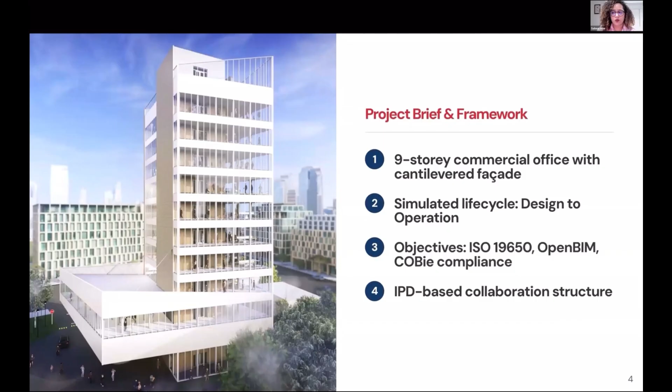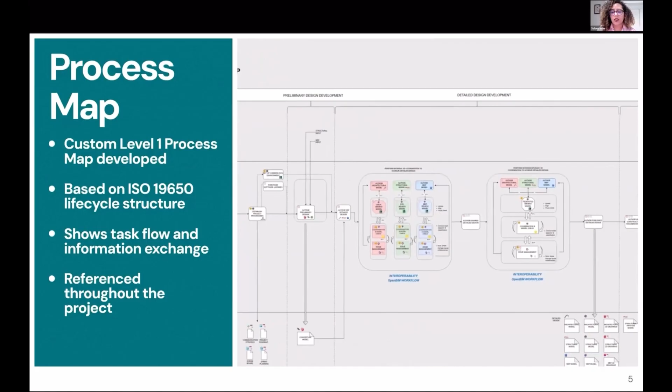To ensure a structured and efficient workflow, we developed a level 1 process map. This high-level overview, based on the ISO 19650 lifecycle, defined the sequence of activities, key decision points, and information exchanges across all project stages. Complementing this, our BIM execution plan served as our central management document. It aligned critical project elements, including team roles, project phases, level of information need, and common data environment procedures. The BEP functioned as both our strategic planning framework and our practical coordination tool, guiding our BIM implementation throughout the project.

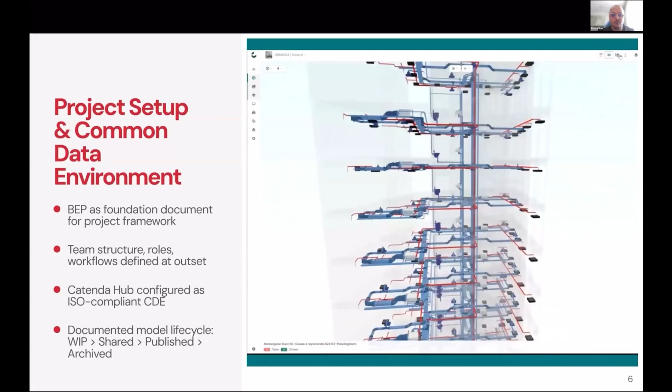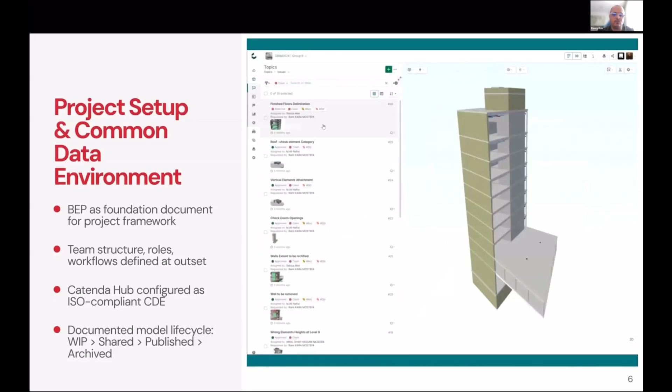To establish a single source of truth for our project data, we used the common data environment. Catenda Hub served as our ISO 19650 compliant CDE, ensuring efficient information management. File access was managed through role-based permissions, with files progressing from work in progress to shared and finally to published. This controlled process, paired with strict naming conventions, metadata tagging, and BCF issue tracking, enabled traceability and centralized coordination throughout the project.

To enable seamless interoperability, we established a comprehensive OpenBIM strategy built on 4 key pillars: tools, coordination, exchange, and federation. We used discipline-specific software, including Revit and ArchiCAD for architectural design and MEP modeling, and Tekla for structural engineering. IFC served as our standard format for data exchange, while BCF facilitated efficient issue tracking.

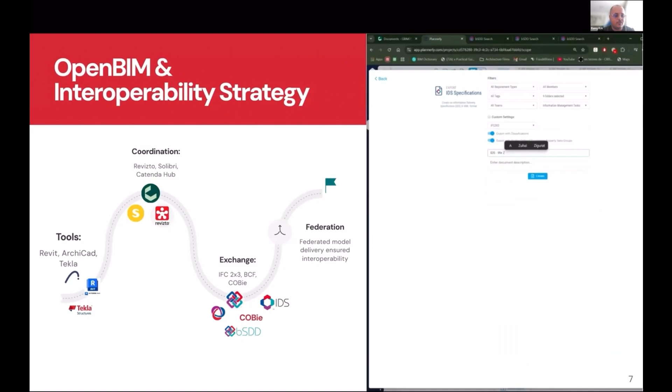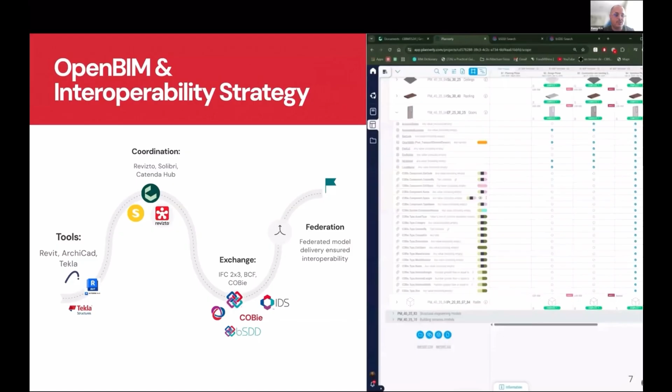To manage data requirements, we used the buildingSMART Data Dictionary, or bSDD, to define structured data requirements within our model responsibility matrix, generating information delivery specifications, or IDS, to ensure alignment, consistency, and compliance with the EIR. As for coordination, we began with federated model reviews in Catenda Hub and then transitioned to Revizto for advanced model navigation and handover planning.

For standardized information management, we applied ISO 19650 Part 1 for principles and terminology, Part 2 for structuring and delivery phase information, Part 4 for standardized exchange protocols, and Part 5 for secure and controlled data access. Part 3, while acknowledged, was outside the scope of this academic project. This framework was supported by our BEP, which included a RACI matrix, structured MIDP, ISO-based file naming, and classified information using the Uniclass classification system. The CDE lifecycle states enabled progression from design to delivery with full control.

In the design phase, the team developed discipline-specific models and coordinated them through structured IFC-based workflows. Clash reviews, model walkthroughs, and validation cycles were conducted during each sprint. Internal quality control was managed using tailored checklists, ensuring consistency and alignment before federation.

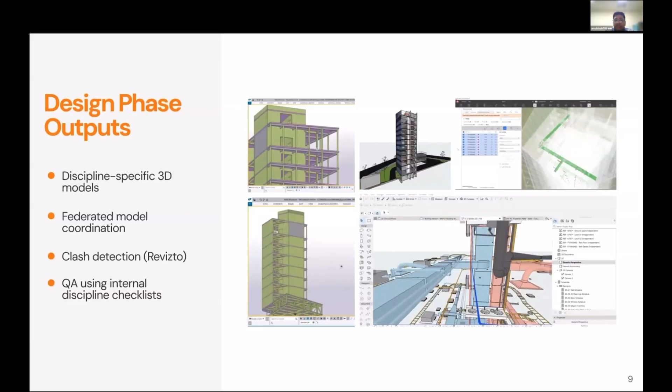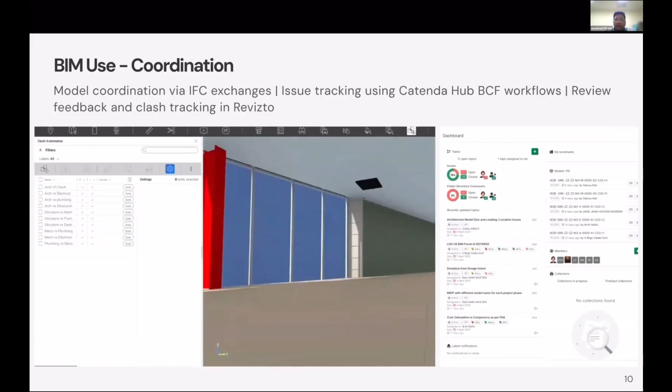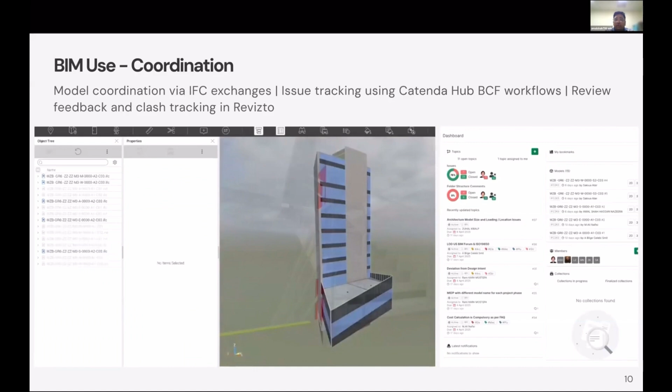Coordination was a primary BIM use. We managed issue tracking in Catenda using BCF from early design, then transitioned it to Revizto for integrated model reviews. For clash detection we also utilized Revizto. The traceability and the visual clarity of these tools enhanced model quality at each delivery milestone.

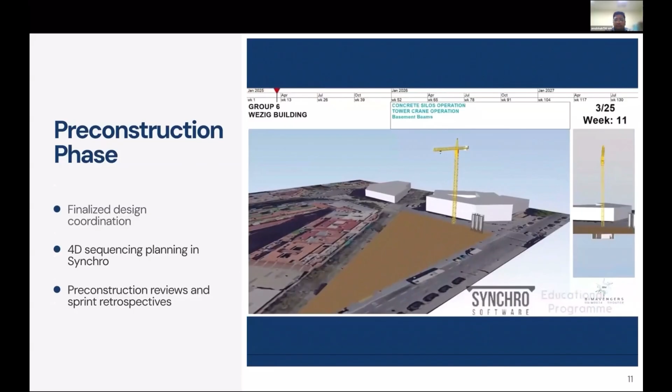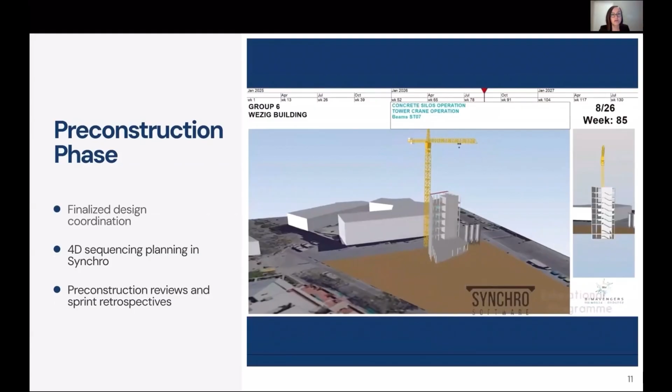In pre-construction, we finalized coordination and used Synchro for 4D sequencing to simulate the construction timeline. We visualized phasing constraints, validated logic, and refined structural and service coordination, preparing the foundation of AIM development.

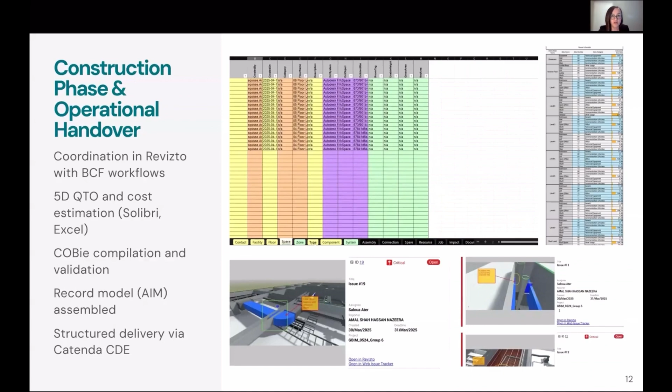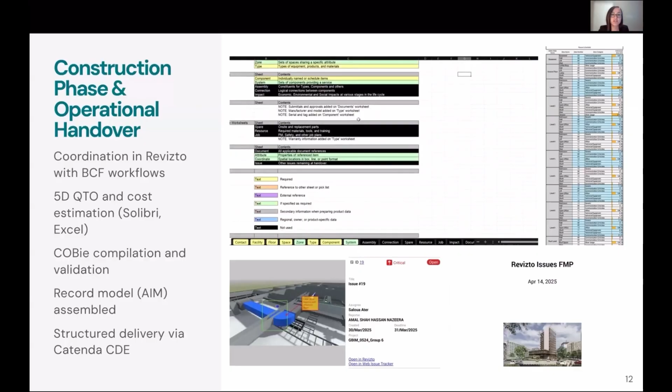During construction and handover, we applied BIM uses defined in our BEP: 5D cost estimation, record model development, COBie population, and AIM delivery. We extracted Solibri quantities to Excel and managed issues in Revizto. The AIM was compiled from federated models with validated level of information need metadata. COBie was populated from Revit and ArchiCAD, aligned through IFC workflows and structured to meet exchange information requirements. All deliverables were validated and published in Catenda Hub, forming a solid foundation for facility management and future digital twin use.

Quality assurance was integrated across all phases, forming a continuous part of our modeling and coordination workflows. Each member performed internal reviews using Appendix 5.1, while cross-discipline coordination was verified with Appendix 5.2. We validated IFC structure and attribute completeness using Solibri, making QA an ongoing and sprint-integrated process.

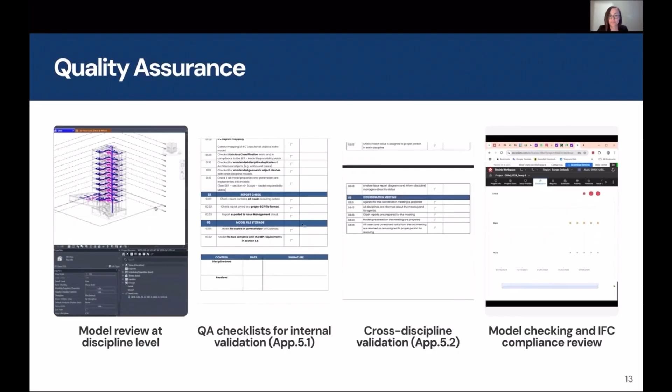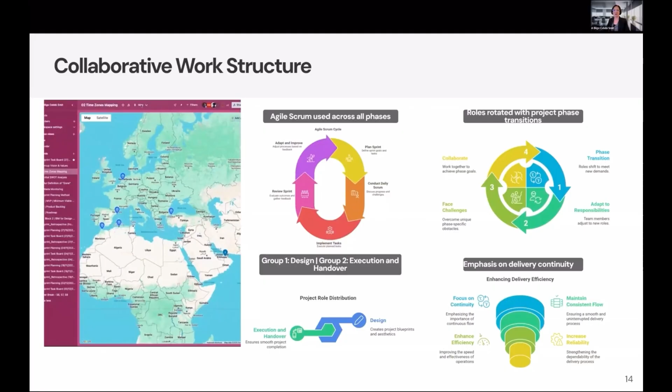We used Agile Scrum throughout, conducting sprint planning, stand-ups, and retrospectives. Role rotation ensured knowledge continuity across project phases. Handover between Group 1 and Group 2 was documented and aligned with our BEP, simulating real-world project transitions.

We managed a complex multi-platform environment by establishing shared IFC workflows and harmonizing output across disciplines. Clear protocols, consistent data structures, and aligned coordination processes enabled us to maintain quality and reliability throughout. Team initiative, structured peer support, and continuous alignment ensured precise delivery across all project phases.

We observed that well-structured data and clear communication consistently led to high-quality outputs. Adaptability across tools and roles enhanced our efficiency and delivery consistency. Above all, collaboration remained our strongest asset. Our results reflected not just technical competence, but a cohesive and agile team effort. This project was more than a technical exercise. It was a coordinated lifecycle-driven delivery, shaped by collaboration and shared standards.